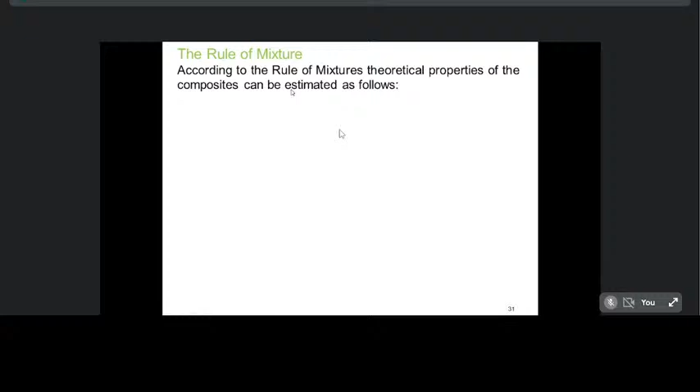So what is this rule of mixtures like? So as I told, you are going to combine in the form of volume fraction or mass fraction or something like that. So according to the rule of mixtures, theoretical properties, I mean, like analysis we do by using software tools, ANSYS and all, like structural analysis. So using some equations or some rule, you can obtain or evaluate the properties. According to the rule of mixtures, theoretical properties of the composites can be estimated as discussed below.

For example, if it is density, so dc, let us say density of the composite. D stands for density, C stands for composite. So you have used two different materials, you have formed a composite. Then what will be the density? After formation of the composite, you can weigh and check it. That becomes experimental evaluation. But this is the theoretical evaluation: dm multiplied by, please note that it is a multiplication symbol, Vm, plus df into Vf. What Vm, dm and all are, we will see.

So it's simple mathematics or simple arithmetic, where dc, dm, df are the densities of the composite, matrix and dispersed phase respectively, and Vm, Vf are the volume fractions, how much volume, for example, 5%, 10%, like that, you'll add. And you'll be knowing the properties before combining. So what is the volume, you will decide.

Density is predetermined. It will be available in the data, like what is the density of, for example, fly ash? What is the density of mica? What is the density of aluminum 7075, the matrix material? So you will be knowing the properties of the individual materials that you are going to combine. Volume fraction you are going to decide, according to requirement. Then using this formula, in cubic centimeter or cubic mm or whatever it is, you can evaluate and you can validate or compare.

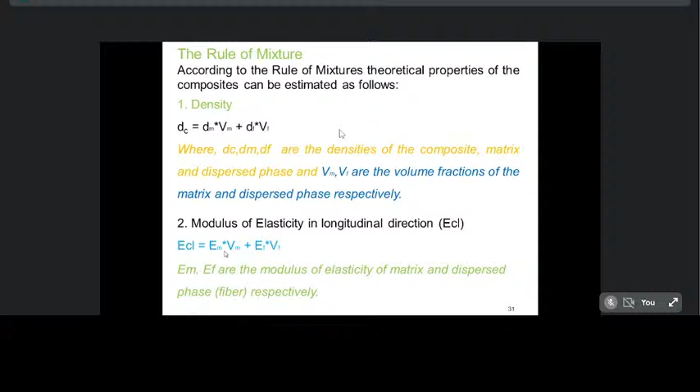And similarly, the modulus of elasticity, you can calculate using this equation on the same grounds. Only thing is, in place of D, E's come into the picture. So these are the moduli of elasticity of the individual materials that we are going to combine, and these are the volume fractions of the respective materials.

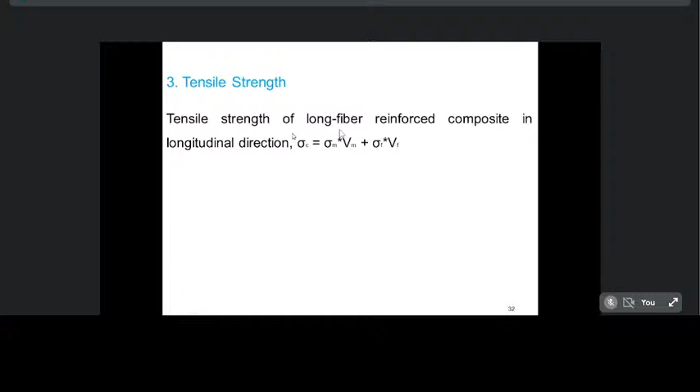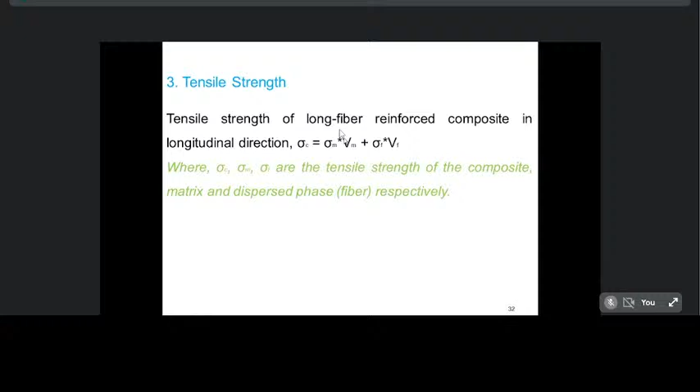Coming to the tensile strength, in the same way, tensile strength of a long fiber reinforced composite, in a longitudinal direction, you can obtain like this. Sigma c stands for composite tensile strength, and this is the matrix tensile strength. F stands for reinforcement. So sigma m is the tensile strength of the matrix, this is of the reinforcement, with respective volume fractions. So this is about the rule of mixtures.

Now coming to the new advancements. As I told, materials are classified as metals and alloys, or metals and non-metals basically. Metals are again classified as ferrous and non-ferrous. All these things you have seen, and you are well versed, it seems. Coming to the present era or present research that is going on, even composites with a single fiber or single reinforcement are outdated, I can say.

I mean, we are not in a position to get the desired properties with one or a single reinforcement. So it is advanced or hybrid composites, I can say. Hybrid composites are relatively new and obtained by using two or more different reinforcements; it need not be two. The rule of mixtures, of course, you can use even if you have more than two.

Or you can even computerize it. You can write a program to evaluate it. No need to calculate everything manually. If you feed the data or properties, it will instantly give the theoretical results, even if you have more reinforcements, because the equation becomes lengthy. So more different kinds of fibers in a single matrix. Hybrid composites have a better all-round combination of properties than composites containing only a single fiber or single reinforcement.

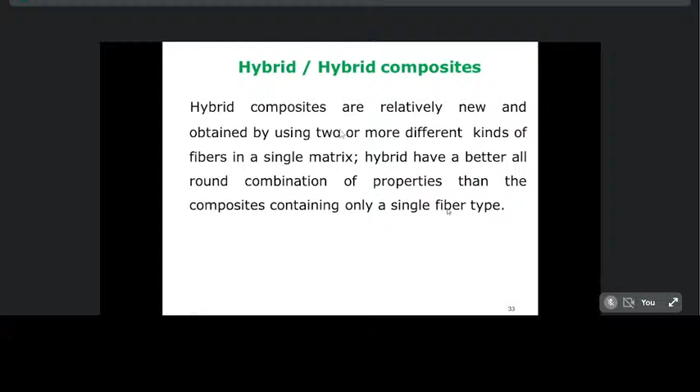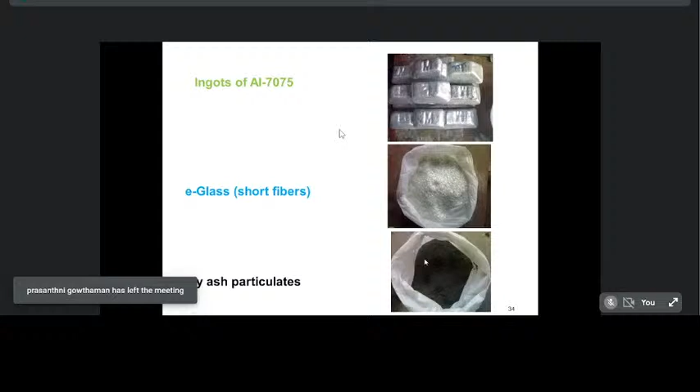E-glass again, short fibers. This is an illustration where more than one reinforcement is used, hence it is a hybrid composite. If you combine these ingots of aluminum 7075 with these two by a suitable fabrication technique, it will become a hybrid composite, or an advanced composite, we can say. Now coming to the limitations, of course, we do have some limitations or challenges of composites. Of course, there will be scope for future work.

High cost of raw materials. Sometimes we need not worry about the cost; the requirement is very important. High cost of raw materials and formation. Composites are more brittle than wrought metals, I mean the regular or conventional materials, and hence they may be damaged sometimes, not in all cases. These are a few limitations. Reuse and disposal in some cases may be difficult. Analysis of the properties is relatively difficult.

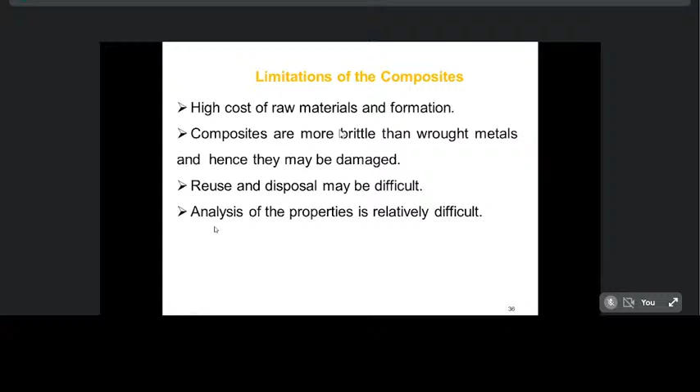Of course, now we are in the era of computation and information technology, so this becomes easier. As I told, you can write a program, feed the data and evaluate the properties very easily. Still, in some cases the analysis of properties is a little difficult. Coming to the areas of application, composites are everywhere: aircraft, missile, space sector, marine, automobile, recreational and sports goods, electrical and electronics. These are the broader areas of application.

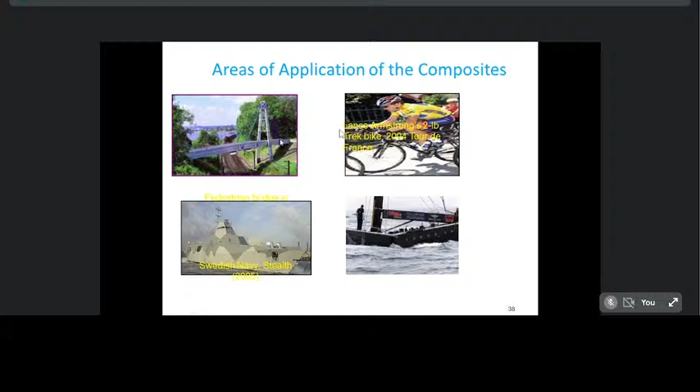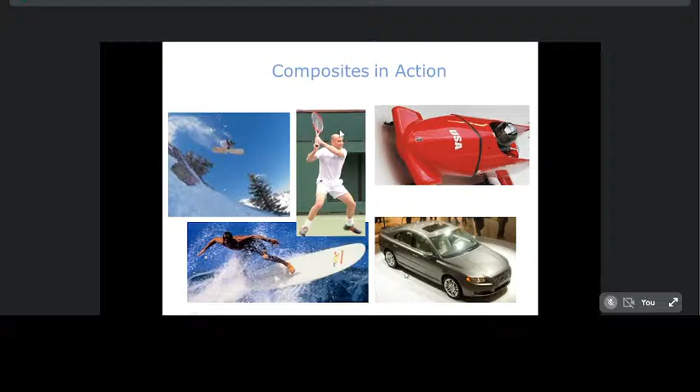You can see a few pictures of the applications of composites. Composites in action, the same thing continues: sports vehicles, automobiles, recreation. Apart from this, I wanted to give some gist of information about the role of manufacturing, because once you understand the material, a little knowledge of manufacturing is also required. So I have taken, as a continuation of this, the role of green manufacturing.

This is a very new topic. The concept of green for the future and for growth, green manufacturing is gaining much attention, my dear friends. Green doesn't mean producing a green product or coloring the product green. It is related to the materials concept. If you use materials which are not harmful to nature, that itself is the green concept or green manufacturing. There is a close relation between these two.

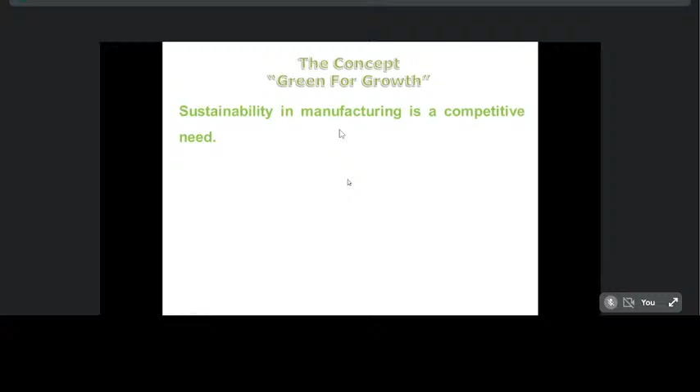Sustainability in manufacturing is a competitive need of the hour, with increasing global warming and industrial waste. As I was telling, fly ash is industrial waste. Disposal of fly ash is a big problem, and it's creating new problems for the nearby people who are living there.

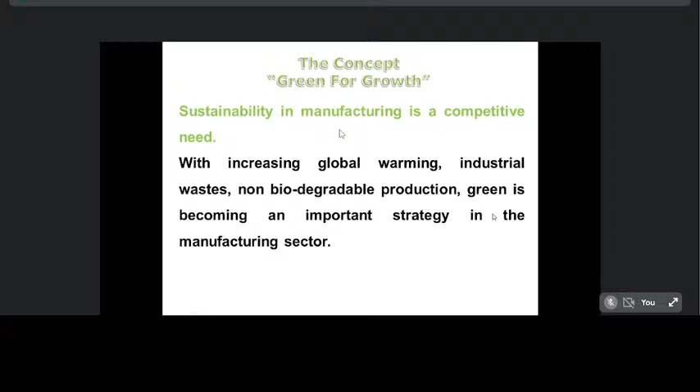Non-biodegradable production. Green is becoming an important strategy in the manufacturing sector. Then what is this green manufacturing, or green products, green materials, all these things? Green manufacturing is a method of manufacturing which minimizes the waste and pollution through an effective product and process design.

You might have heard about JIT, the Japanese technology, just in time. Long back they implemented it, but I'm not linking JIT to this green manufacturing, it's just an example I'm giving. So green manufacturing is a method of manufacturing that minimizes the inventory, or minimizes the waste and pollution, through an effective product and process design.

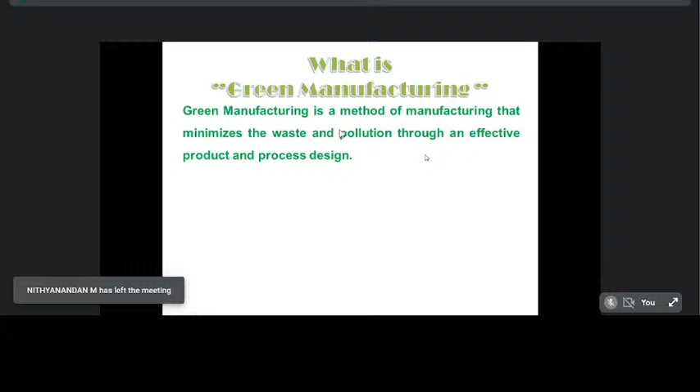It is an economized manufacturing process that tends to exploit all the available resources, reusable wastes, and thus reliving the concept of environmental sustainability. So this is very, very important. If you simply develop the materials, of course disposal and environmental sustainability also matter. That is the reason why I have taken this in addition to that.

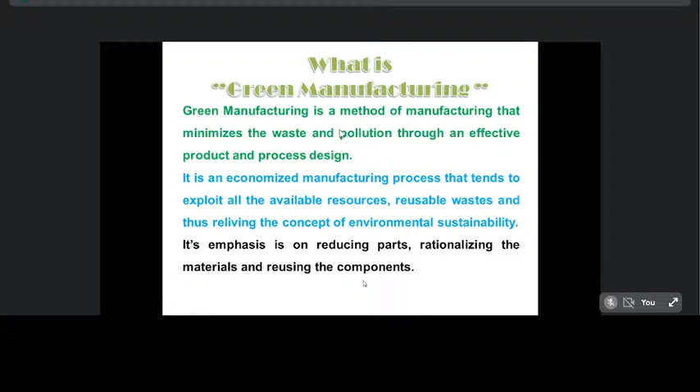So it encompasses, in other words, it emphasizes and focuses on reducing parts of structure, parts of emission, and so on. So rationalizing the materials. All the resources we should use like a ration. It is like a property of the nation, we should use it like a ration. And reuse the components. All this put together is termed as green concept or green manufacturing.

And coming to this, one more, just a continuation of this. Manufacturing of green products, that means producing those products which use less natural resources and can be reusable and recyclable. So again, this is linked to material. While developing the materials, we should think of this also, whether they are recyclable or reusable.

So not only the formation of new composites or new materials; the challenge is about their disposal, and their reuse also matters. Reuse, reduce, recycle. In a nutshell, this is the concept of green product or green manufacturing, which is made up of some materials, of course.

Reuse: the material should be in a position to be reused. Reduce the number of parts, reduce the size, reduce the weight, maybe anything to everything like that. Recycle: after some utilization, we should be in a position to utilize the 3 R's. So reuse, reduce, and recycle.

Coming to the outline of this green manufacturing: implementing any kind of substitution in the manufacturing process. Already there is manufacturing, no doubt. So what is this? Implementing any kind of substitution in the manufacturing process which leads to the reduction in energy consumption. This is very, very important. Reduction in resource consumption, energy consumption, and waste byproducts during the formation. Many byproducts are used in the formation of a raw material or of a new product.

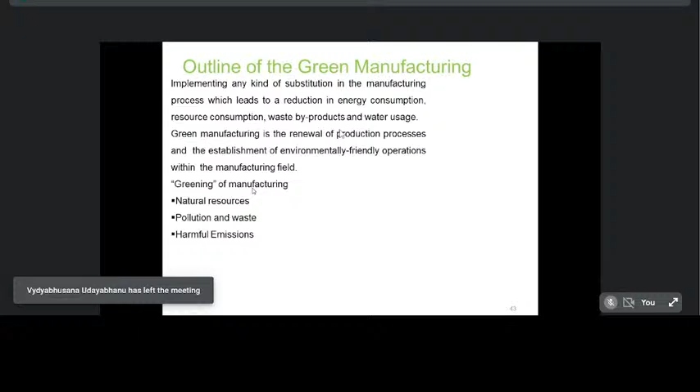And water usage. Green manufacturing is the renewal of production processes and the establishment of environmentally friendly operations within the manufacturing field. Of course, greening of manufacturing. All this put together is called greening of manufacturing. No doubt we have to have the manufacturing.

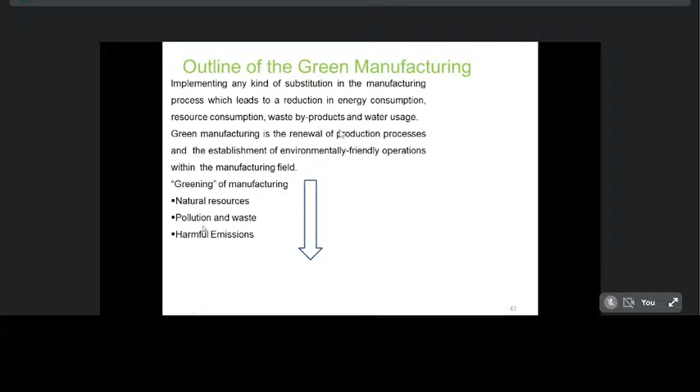Just to make it green: lowering the natural resources, pollution and waste, and maybe the weight. Harmful emissions, all these things, if you minimize them, that will become green manufacturing, green product, or green material.

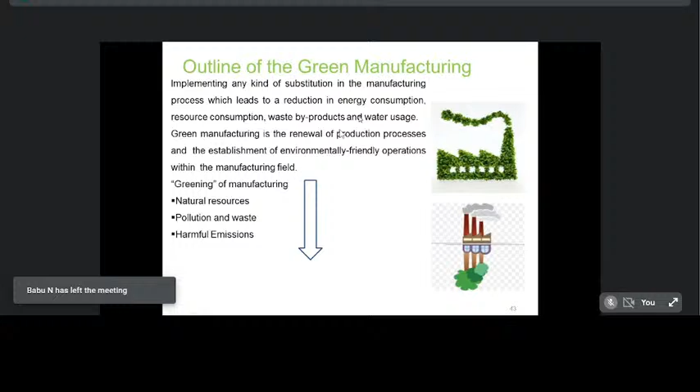Now, what does green mean? Green stands for ecological sustainability and encompasses many different concerns, including air, water, natural resources, land pollution, energy usage, efficiency, waste generation, and recycling. Green initiatives aim to minimize the impact of human activities on the environment.

No doubt, we need the product, we need the structures, we need to upgrade our infrastructure, we need to build automobiles. That is a continuous process. They won't decrease; they'll keep on increasing. But at the same time, green initiatives aim to minimize the impact of human activities on the environment.

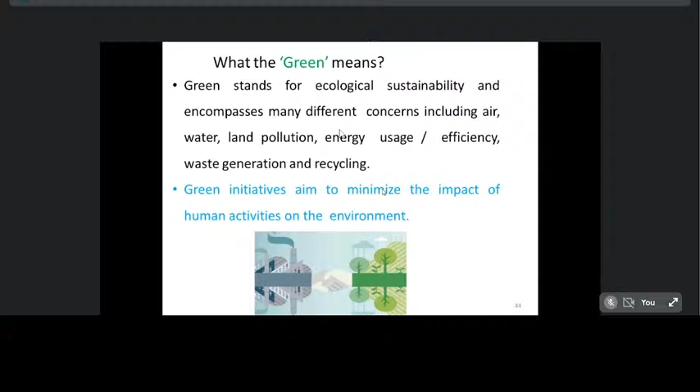In such a way, you have to think about the future energy sources or future materials or generations. So we should leave some resources and other things for the future generations also. That should be our concern and top priority.

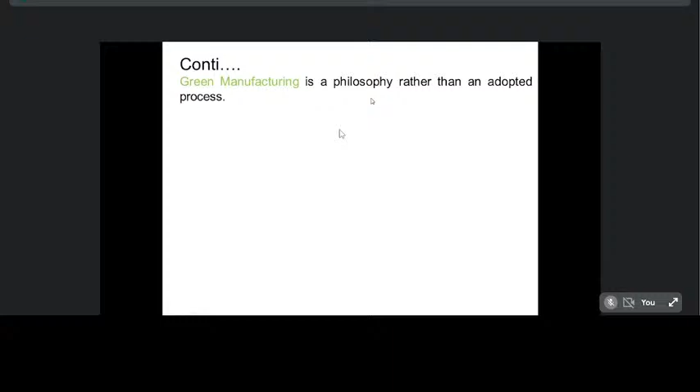So green manufacturing is a philosophy. Rather than calling it a technical concept or process, it is a philosophy. Self-discipline; everybody should imbibe these kinds of concepts. It's a philosophy rather than an adopted process.

It is a holistic endeavor intended to minimize the waste, produce cleaner products and processes, a better and safer working environment, and build the relationship between companies and the local communities. There will always be clashes when there is a dump of some unwanted material, leading to societal problems. So there should be a harmonious or cordial relationship between the companies and the local communities.

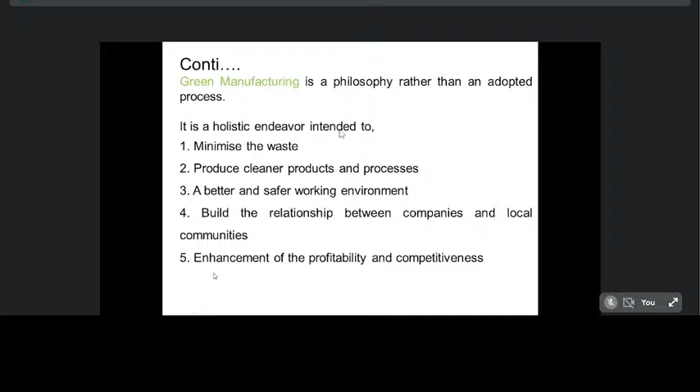That is the objective. Enhancement of profitability and competitiveness is also one of the objectives. Then, transformation to green manufacturing: green energy, green processes, and finally green products.

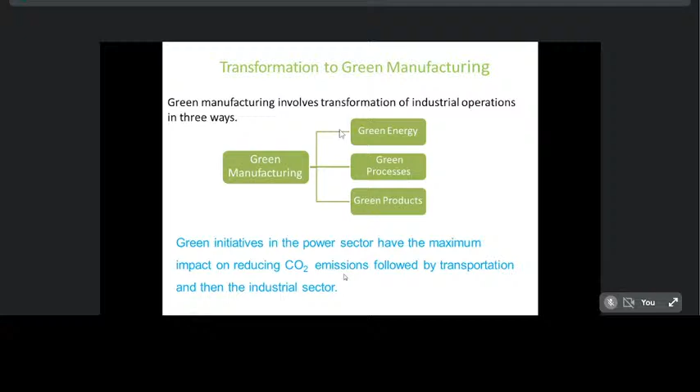Green initiatives in the power sector have the maximum impact on reducing CO2 emissions. This is a big threat to the environment, and it leads to many problems if there is much emission of CO2, followed by transportation and then the industrial sector, where there is maximum release of carbon dioxide. Whereas if you adopt the green philosophy, it may be reduced to the maximum possible extent.

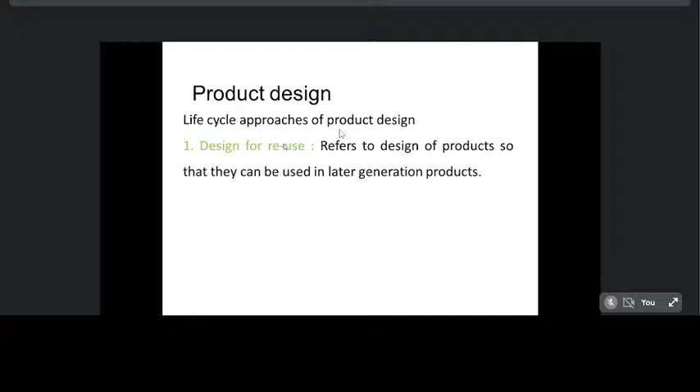For any product to be successful, no doubt you need good material. Without that, no product exists. Without material, you cannot imagine any product. Even to give a service, you need some material. A computer may be a device which computes, but basically it is made of some material. It gives service, but the basic thing is the material.

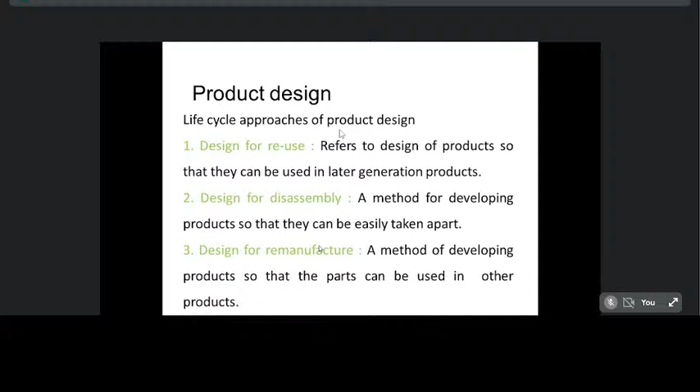Life cycle approaches of product design. You always have to think of three things: design for reuse, design for disassembly, so it should not be very complex if you want to dismantle or disassemble, and design for remanufacture. You also have to think of the selection of materials as per the concept of green manufacturing and green philosophy.

Coming to the goal of green manufacturing in one line, the purpose is to support future generations by attaining sustainability by means of preserving the existing natural resources. This is the holistic approach or single-point agenda of green manufacturing.

Coming to the benefits of green manufacturing, it creates a great reputation with the public. The reputation of a company is always important, because it can float or sink a company. Unless they maintain a good relationship with the local people, it may be very difficult to operate the company. If a company pollutes its neighborhoods, people would begin to move away, creating a lack of employees. Nobody may like to stay there.

It saves useless cost, which is value addition. Even if you decrease the cost, indirectly profit is increased, as we say in economics. Eliminating waste is like increasing the profit to an organization or the end user. Eliminating waste saves money, because companies would not have to figure out what to do with parts in the end when they could be recycled. That is also very important.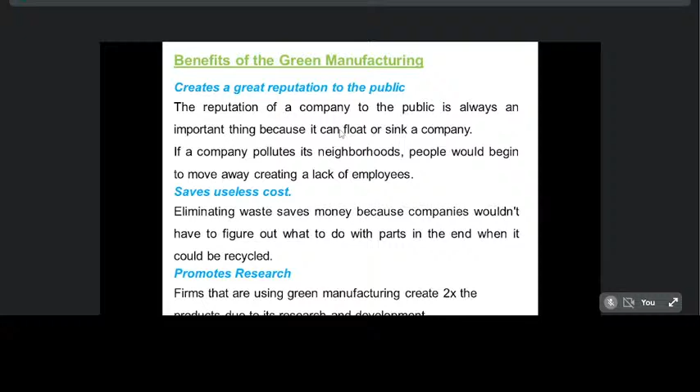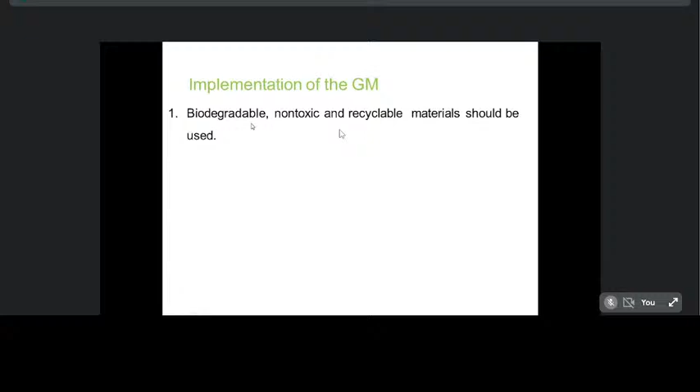It promotes research; there is much research scope. Firms using green manufacturing create 2 times the products due to research and development, and productivity may also enhance. Of course, there are some challenges in implementing GM, that is green manufacturing. Biodegradable, non-toxic and recyclable materials should be used. Products must be designed for disassembly, remanufacturing and reuse. Move from traditional to new technology.

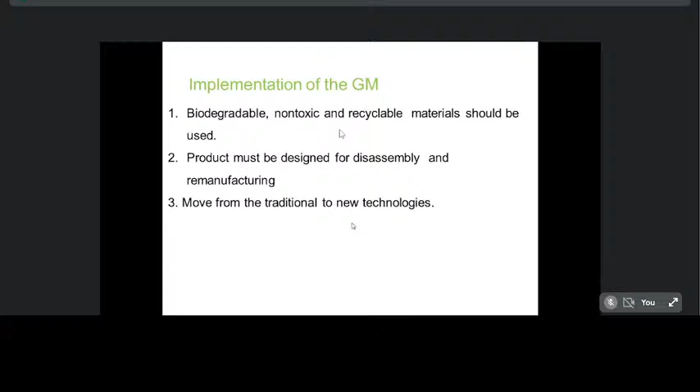Only change is constant. To adapt to the change or cope up with it, as change is permanent, we need to move from traditional to new technologies, upgrade, and do process optimization to minimize losses and wastes in energy and materials throughout the production process.

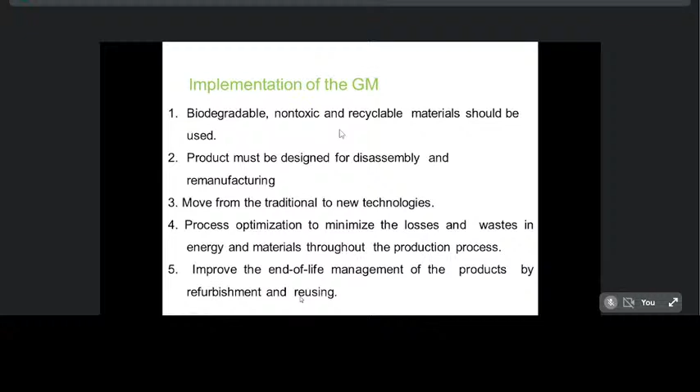There are some industries, I've visited refurbishing industries, where the same product which was almost about to become scrap gets refurbished and given to the customer. So that is nothing but improving the end of life. It's not that the product ends there, it will restart by refurbishing and reusing it. Of course, few challenges are there in implementing this.

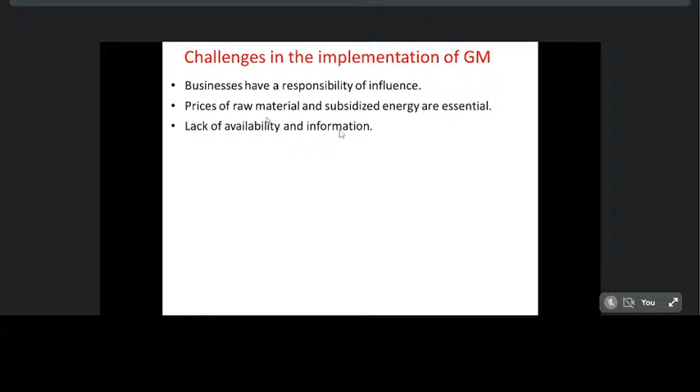Businesses have a responsibility of influence. Prices of raw material and subsidized energy are essential. Still, this doesn't have much publicity. There is a lack of availability and information. High profile leadership is required.

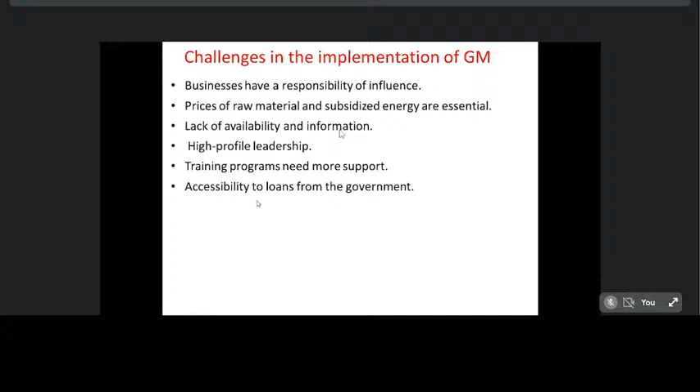We should think in a broader sense, a bigger way, broader perspective. Training programs need more support, so accessibility to loans from the government. National cleaner production centers need to be established, and separate wings are required to promote this.

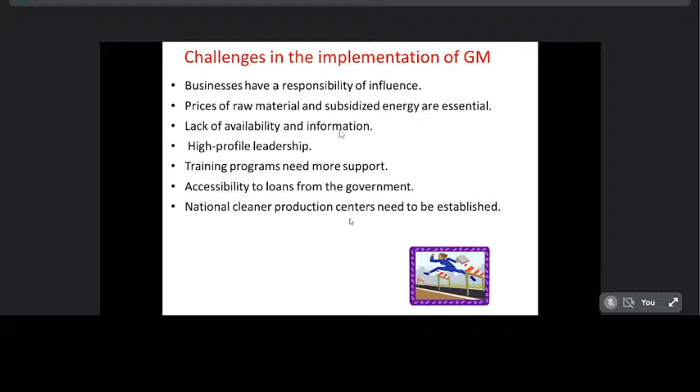So of course there are a few challenges, as I told, but we can overcome all those challenges. So these are few green products that are in use.

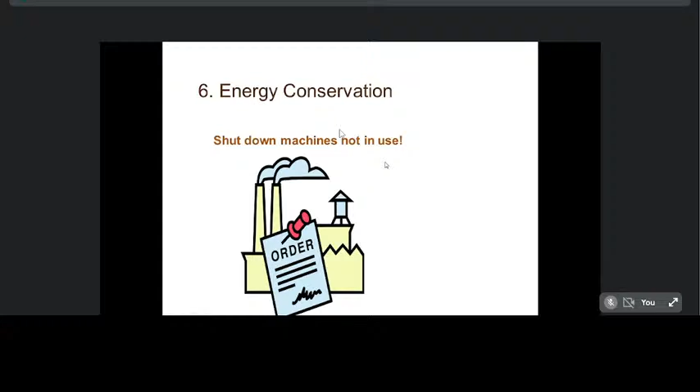Energy conservation, because 1 unit of saving is equal to 2 units of production - 1 rupee saving is equal to 2 rupees earning, think of it like that. So for energy conservation, shut down machines not in use, or lights or anything not in use - that's also part of it. Replace the old appliances, since sometimes maintenance cost will dramatically increase if you're using old appliances.

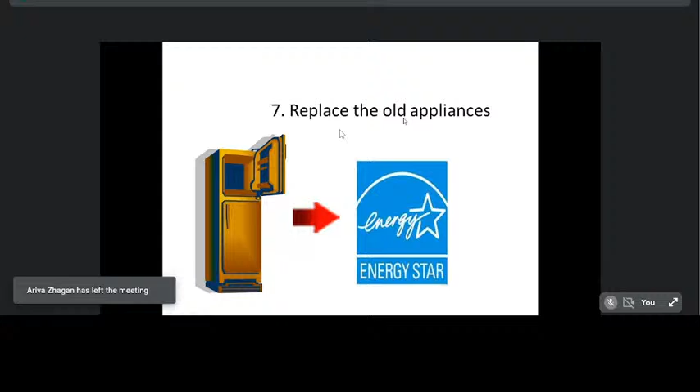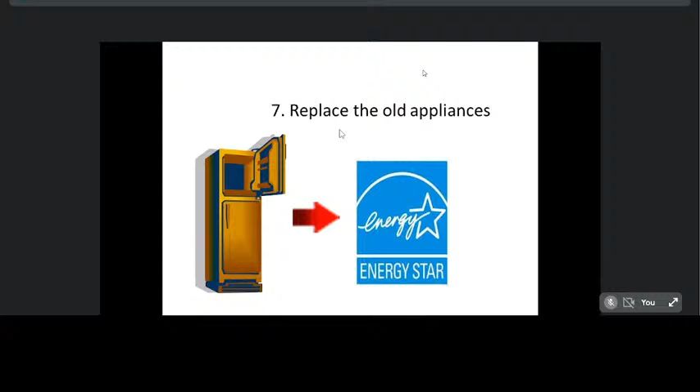So somewhere you have to replace. There is a concept called replacement analysis for that. So where, okay, once the break-even is crossed, I mean maintenance becomes more costly than a new product or something like that, then you have to be wise engineers. So you have to be very wise to replace old appliances wherever required. Reduce the waste, of course, this is covered.

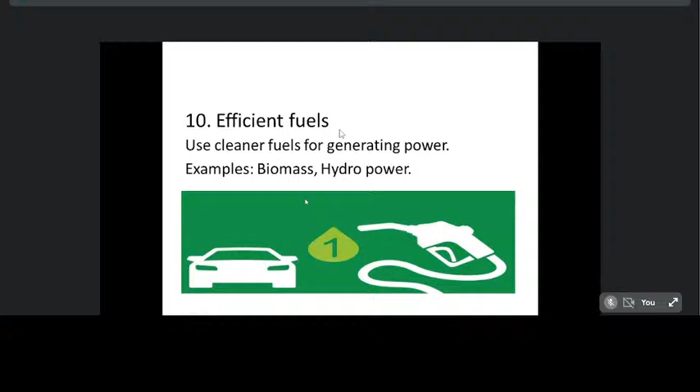Reuse of the material, so efficient fuels, use cleaner and more efficient fuels for generating power - biomass, hydropower, all these things. Green transportation, electric vehicles, fuel cells, and biodiesel are some examples of this category.

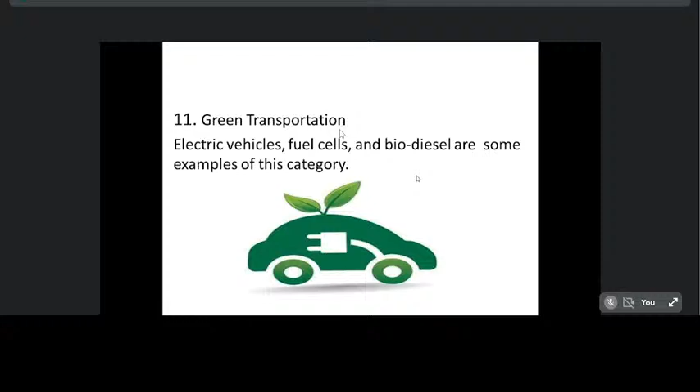Biodiesel is gaining focus. It also reduces the emission of CO2, which will minimize the impact and burden on the environment or nature. And ultimately, recycle - so as to keep using the materials to the possible extent. That's what I wanted to convey in the given time slot, my dear friends.